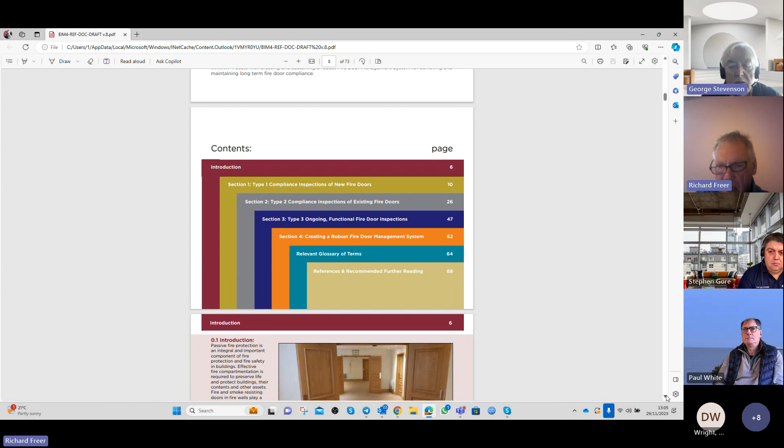There's the index. Just before we move off that, one of the things that has become very apparent, and I think we're aware of anyway, is obviously with the new regulations, the regularity of inspections is increasing.

What I was talking with a fire engineer this morning, and he was saying that they've just completed some work on a hospital that's been open for 12 years. And they've identified in this last sort of 3 months that there are 300 fire doors that are not acting as fire doors - in other words, they're not in compartments. So therefore, for the last 12 years, they've been maintaining these and inspecting them as fire doors where they don't need to.

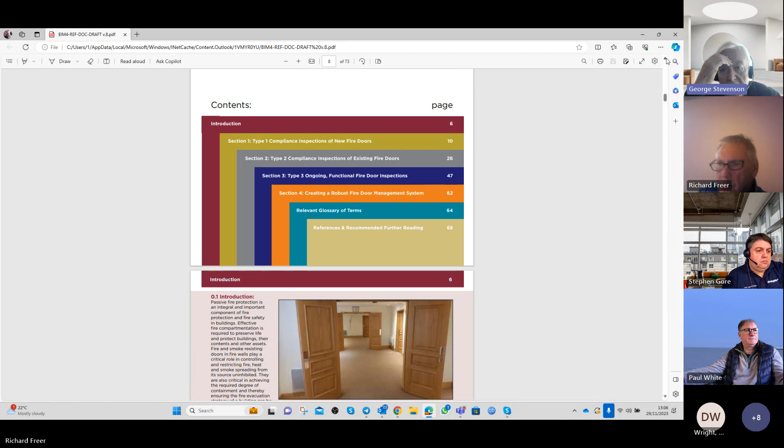And I think that's quite a regular problem that I understand happens. So to a great extent, if you scroll up for a second, Richard, the point that the team have made is that the initial inspection of section 1 and 2, or the type 1 and 2 surveys, either for inspecting a brand new fire door and making sure that it's fit for purpose to create that baseline, that is only ever done once.

And then the type 3 surveys are the ones that get done regularly. And exactly the same with the existing fire doors - that inspection's only done once to identify what it is and whether it's the right thing for the right context. And then on an ongoing basis, you've got the type 3 surveys.

So I'm sorry if that was interjecting. No, I'm glad you did. That's something that I've learned over the last year or so, as a layperson, obviously. Yeah, anyway, carry on, Richard, please.

Sorry, I'm just finding - can I just say something to follow through with what George was saying? The issue at the moment is everybody thinks they're doing a type 3, but because of all the legacy stuff, they're actually doing a type 2. So until we get to the point where everybody's had a more recent type 2, then the type 3 is still irrelevant to an extent. So unless you've actually got a type 2 report sitting there, which if you don't have that, you need to get, then you can't really move on to a type 3.

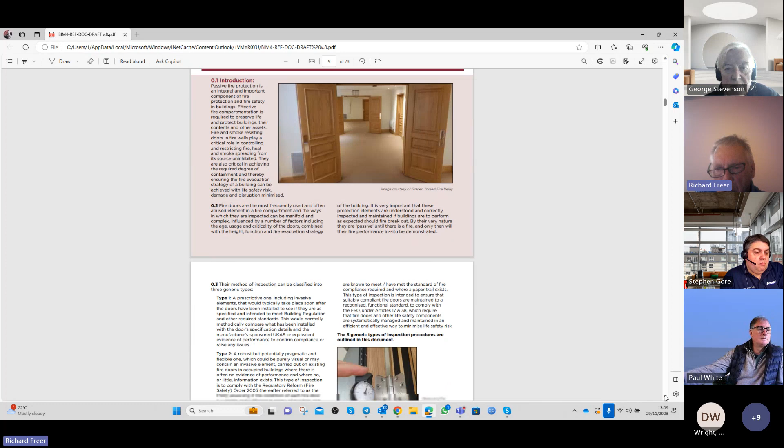That's brilliant. Thank you. Okay, let's just whiz through this. So this goes into some detail.

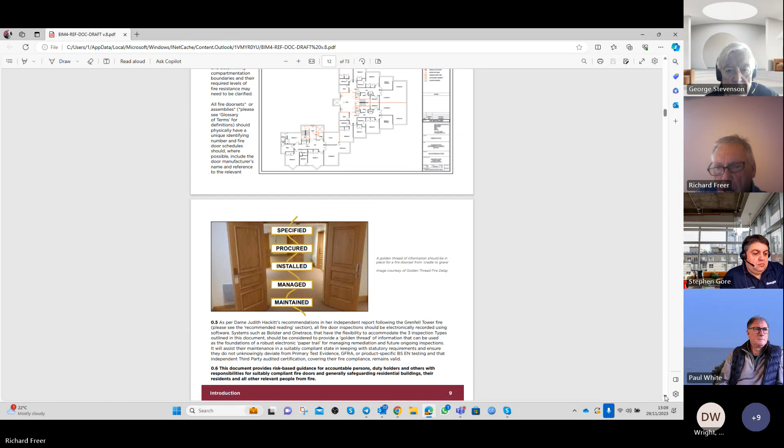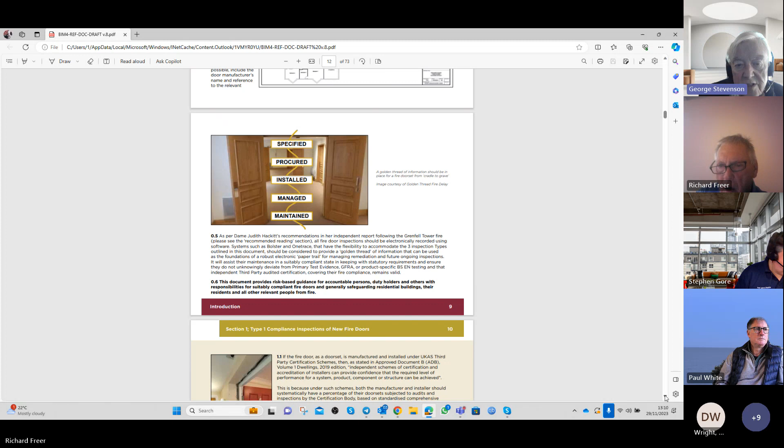George, if you want to comment on any of this, do so. Yeah, as I understand it, fire door inspections are still not there, although there's a number of different accreditation agencies and the like. There's still no qualification per se, no requirement for the person doing the inspection to be at any level. So this is an attempt, I think a very good one, to provide that background and guidance for people to be able to do that.

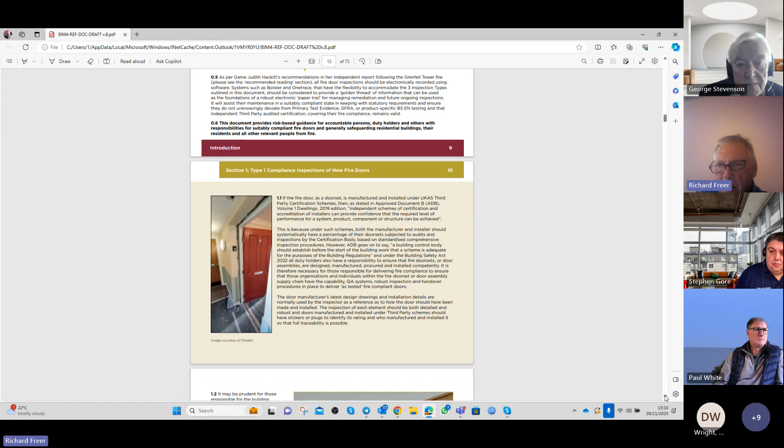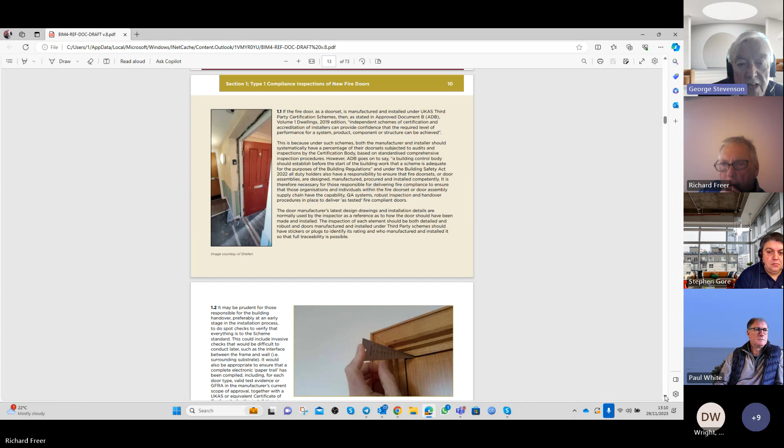All right, this is about compliance of inspections. Sheldon, for example, who are one of our members, one of the collaborators, they've provided those examples there. So carry on, Richard. No, please do, please do.

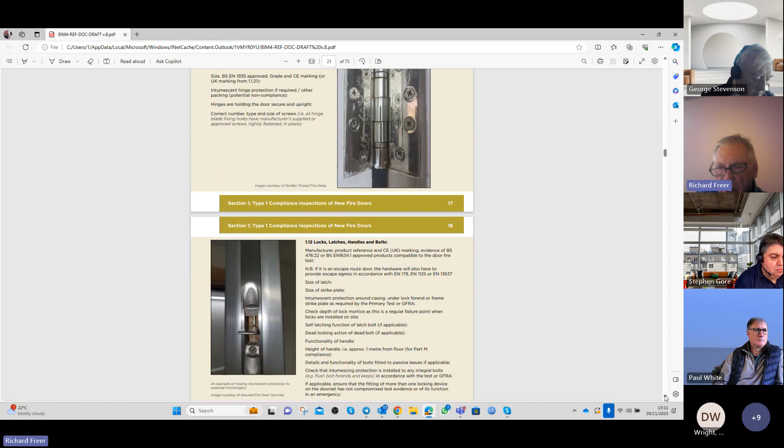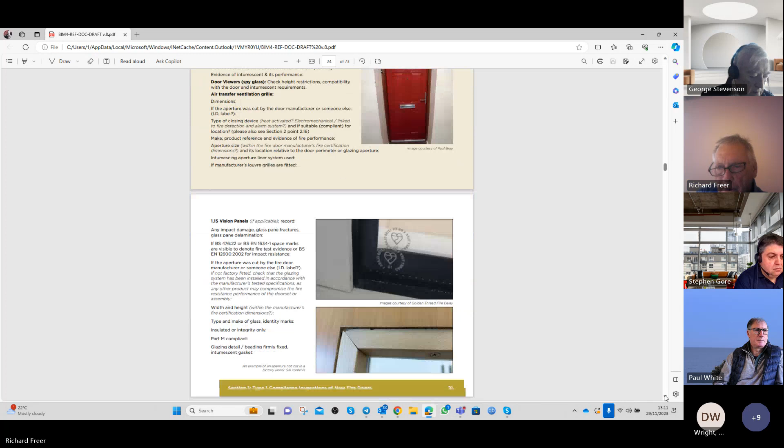That continues with now looking at new fire doors, compliance. And then we go into a lot more detail, looking at gaps and seals, hinges, locks and latches, the door closer, and any other ironmongery, such as letterboxes, vision panels. So there's quite a bit of detail in here.

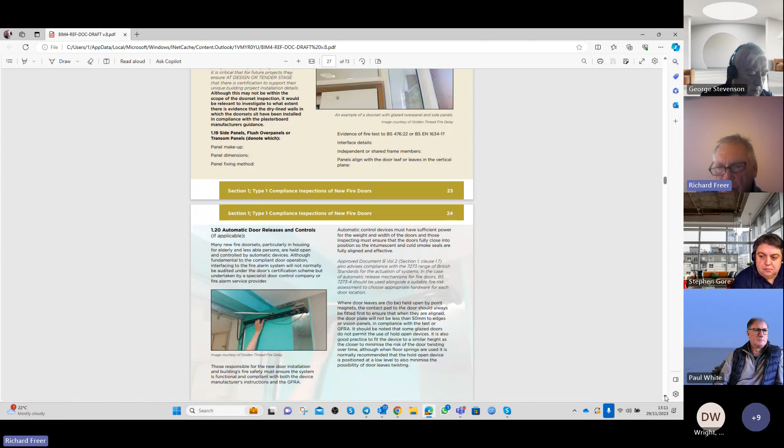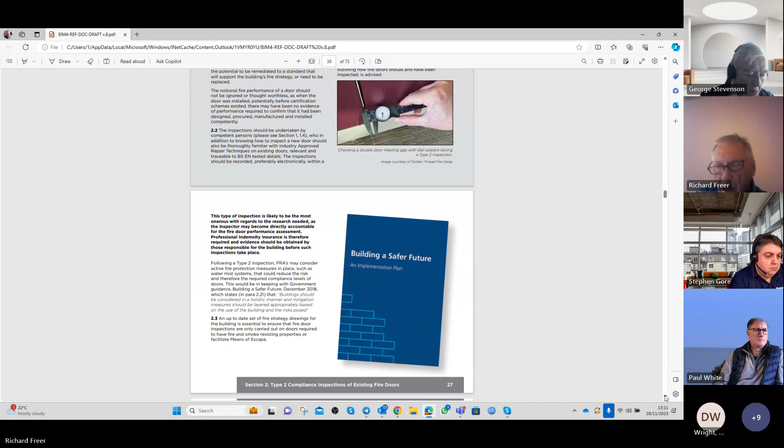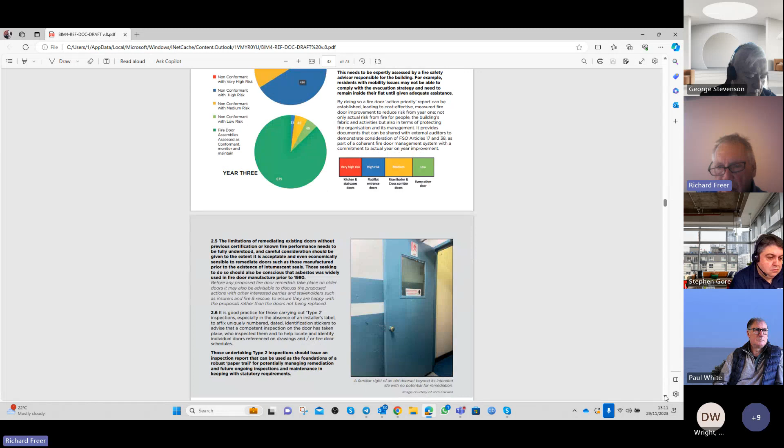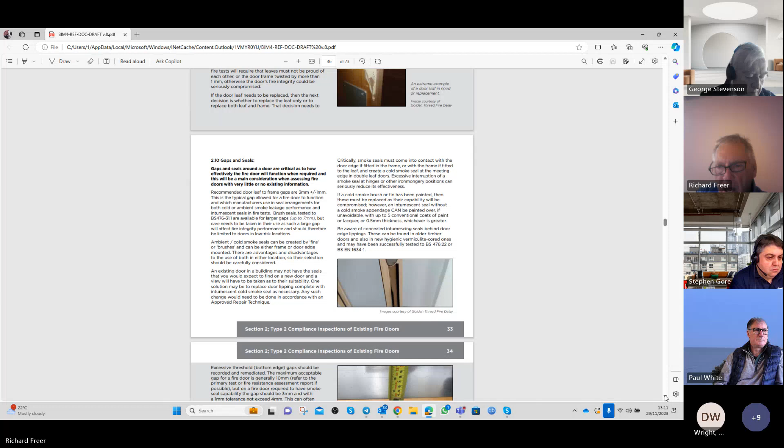And this is all for type 1 inspections. Type 2, which is about existing fire doors, it's a bit more complex, looking at the absence of information. Again, the various examples of things that are wrong.

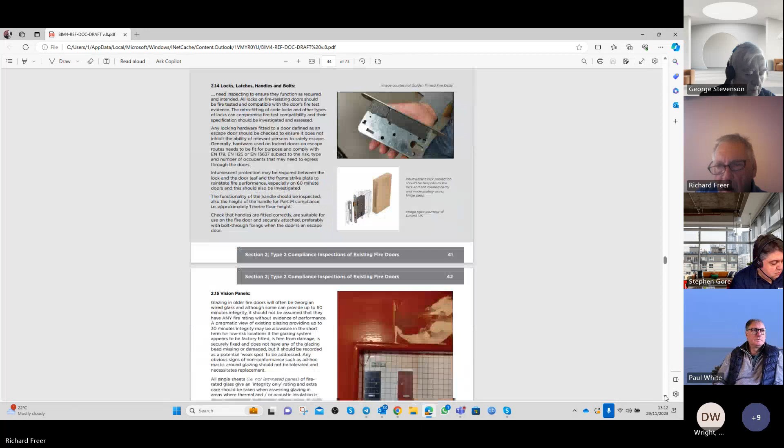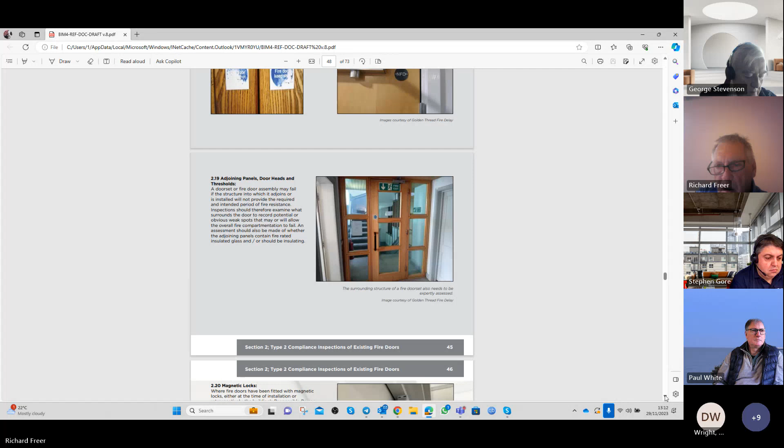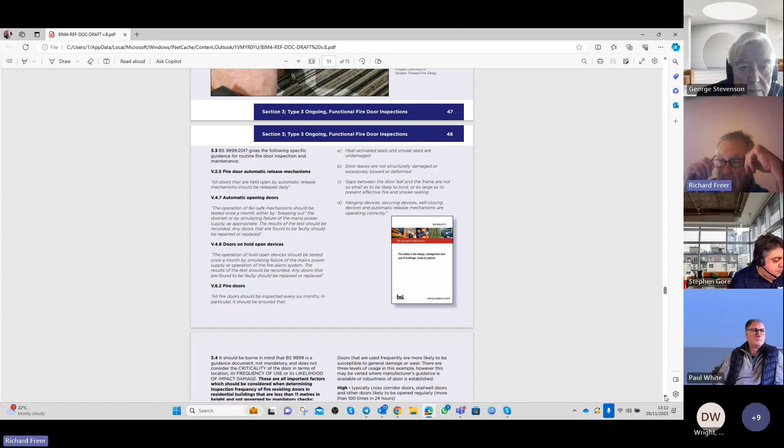It's very thorough, isn't it? Right, type 3, as Paul said, these only come into play once type 1 or type 2 has been done. These are the less onerous, but just as important, obviously.

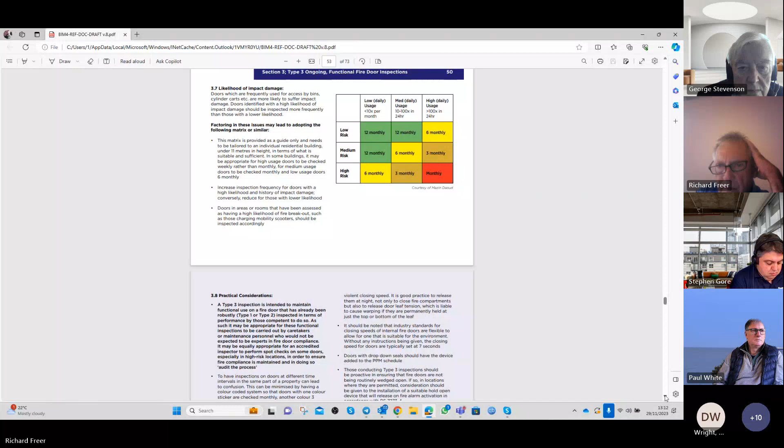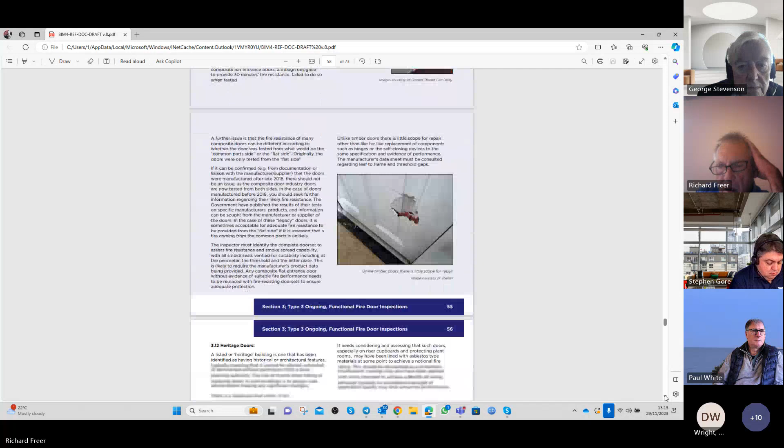I think the important thing here as well is, as I understand it, there's no such thing as a simple checklist. That's why there's quite a lot of background on this, and also you've got to consider it in line with the fire strategy and the other considerations. But yeah, carry on, Richard.

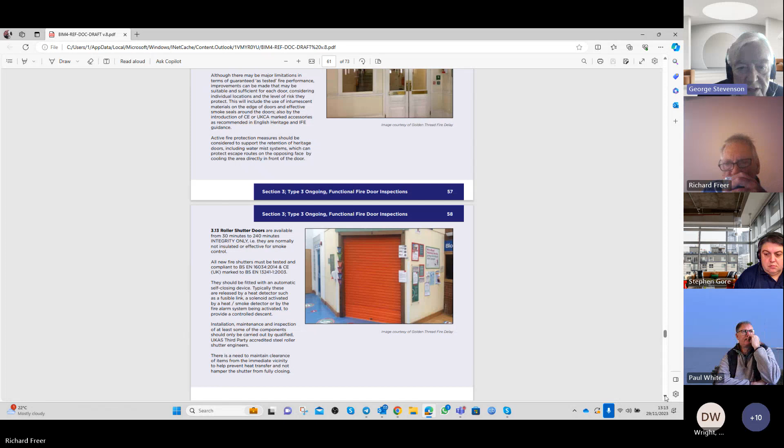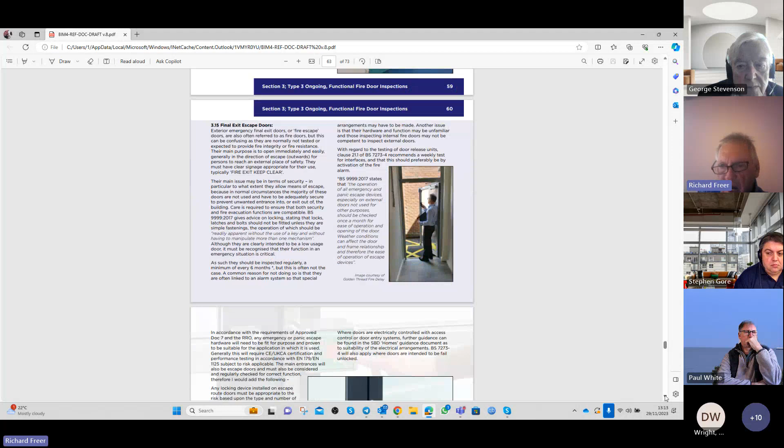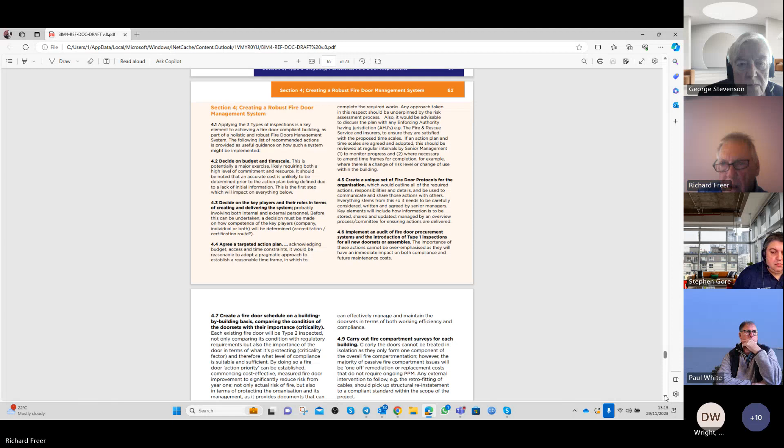Looking at the different functionalities. Yeah. And now the planning, it's about creating a fire door management system that is robust. And then just glossary. So quite a nice looking document we've got together there, I think.

Anybody got any comments on that? Yeah, no, not comment. I think that looks very good. I mean, perhaps the only thing, I haven't looked through it in any detail, Richard, but one of the things I've been trying to say to people when they're going to look at smoke control systems and fire damper systems, which is a similar thing, is where's last year's report? Where's the schedule?

Yeah, and I don't know whether that's mentioned in here. So, for instance, where's the type 1 report? Where's the type 2 report? And if you've got a management system, then brilliant. But what's changed, and have things been fixed? Because one of the key things when you're auditing something is, you've been given this list last year, and you only did something a week ago. Do you think that's adequate?

So look at whatever records exist, and if there have been any intermediate things - a positive record is just as good as a negative record, because it shows that somebody's looked. If that makes sense. So it's things like that when you're auditing, you can have confidence in the management system.

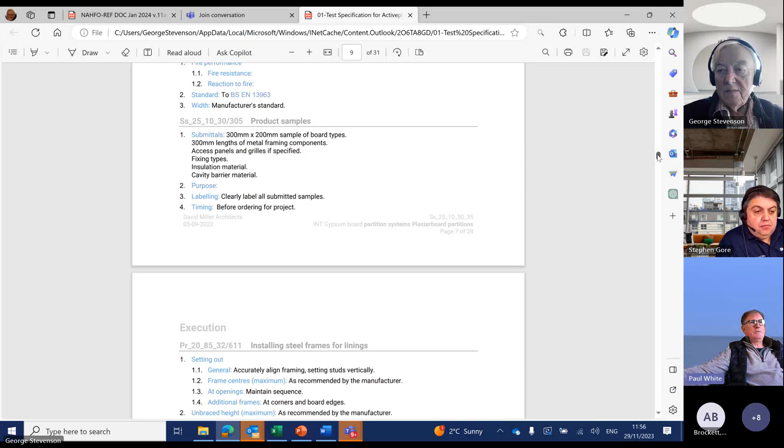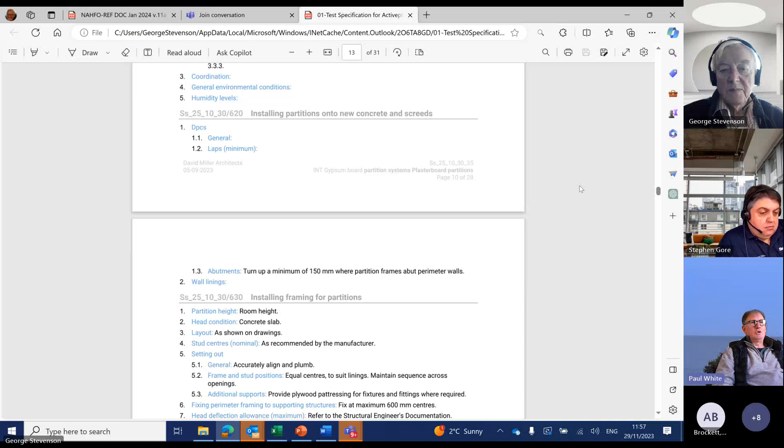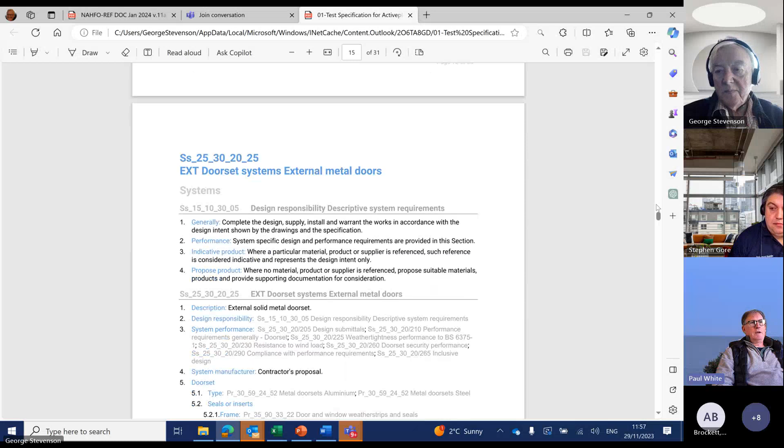I mean, I think that's the point, George. This is a kitchen sink specification to the nth degree, and the point is that it's meaningless because there's way too much information. And this is the problem. In terms of an FM manager going to replace a door, unfortunately, they're going to have to find an expert, because they're going to have to consider everything and specify the correct door, because at that point they have a design responsibility. And again, I think what we're seeing is that most people don't realize the level of responsibility they're taking by just changing things.

Yes, and I don't think they realize the responsibility they're taking by not fixing things either, but because they have no experience of it. For example, you've got a housing association that's got a particular problem where a tenant - the entrance door to their flat's been smashed in.

So the asset team have got to obviously make it good as quickly as possible. Now they can obviously put something temporary in there to provide some sort of security, but it's not the case that they'd be able to so easily go back to the original supplier. I don't know, it seems to me to be a complex thing.

And this is your chicken and egg situation where you're absolutely right - at the moment, it's impossible. So therefore, you've got to find somebody who's a designer who's got to go and look at that and do it properly. Hopefully, going ahead with the golden thread, they'll just be able to go doop, doop, doop - oh, it's one of these doors, and then they go and buy one and put it in.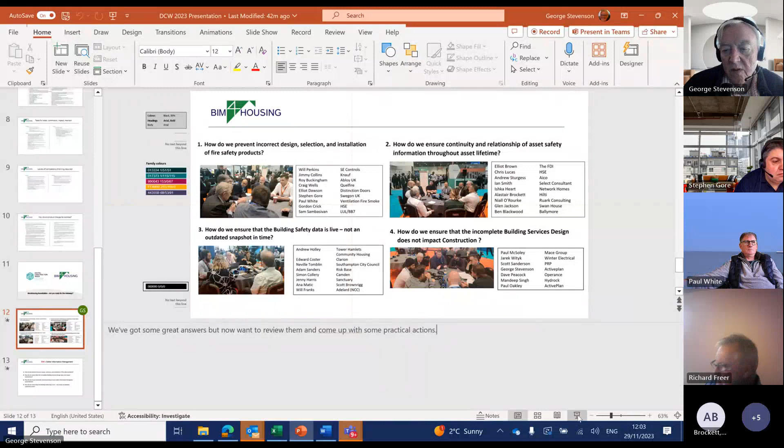So these are questions that came up in the summer, exactly from what we've just been talking about: how do we prevent the incorrect design, selection and installation of fire safety products? We had the workshops and we've produced a document from the suggestions that people have made.

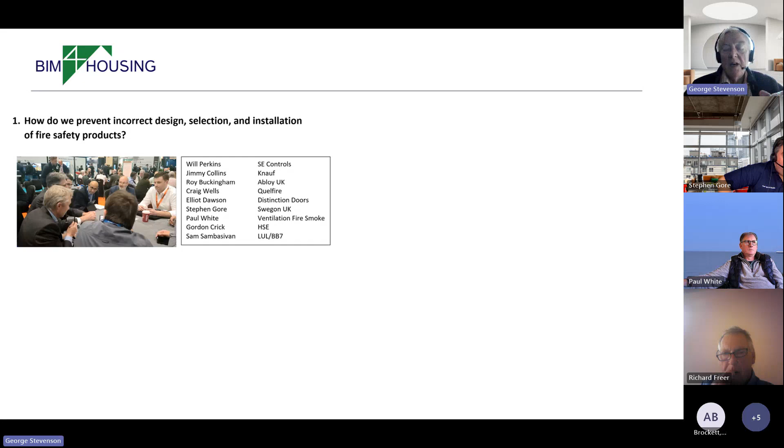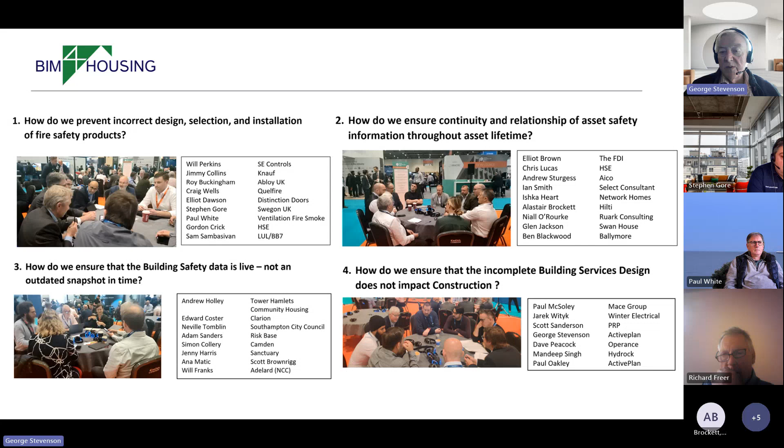This is the next question: how do we make sure that the asset information continues through the process? Also, how do we make sure that the safety case information is not just a snapshot in time, that it's a building safety management system? And also, how do we ensure that in particular contractor design portion, the M&E design doesn't get done after all the partitioning is installed? So we've been doing this now - a lot of people on this call know this.

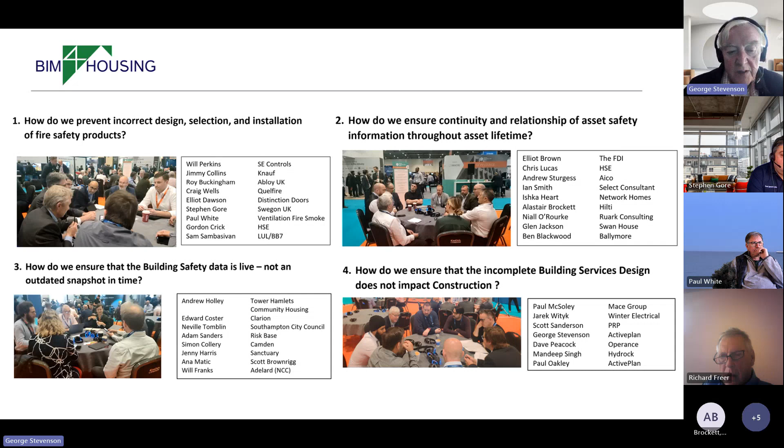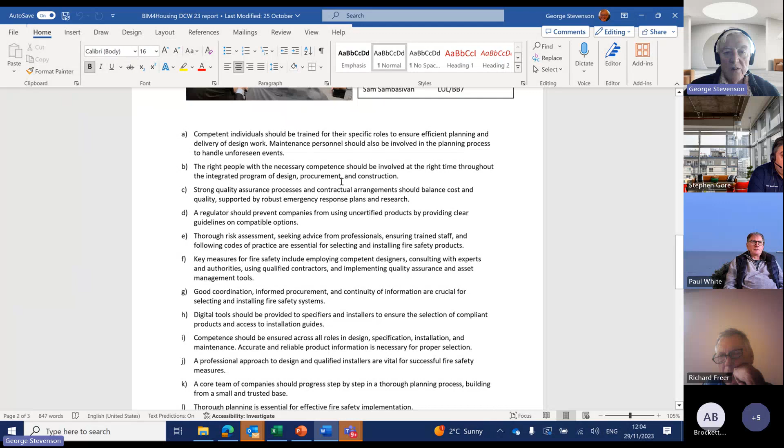We produce this document, which is the summary of that work - these are the sort of contributions that people have made, which I think has been quite well received.

And then, so we've got next week two sessions of new people looking at these as well. I think, Richard, we've got about 20 to 30 people on each of those sessions, haven't we? Something like that - over 30, 20 to 30 on the first three.

Around about 15 or 16 signed up so far on the fourth one, but there's still people signing up, and new people also. The purpose of this is to flush this out, because these are the questions we've actually been talking about this morning.

Should we just put it if you want to come along? Right, there are 2 of them on the 6th of December, and 2 of them on the 14th of December, so those are the days. So put in the chat that you're interested and which question, and the dates, so people know exactly.

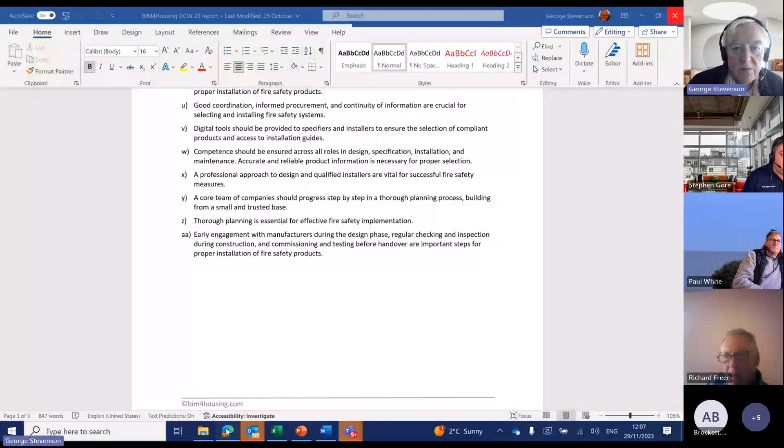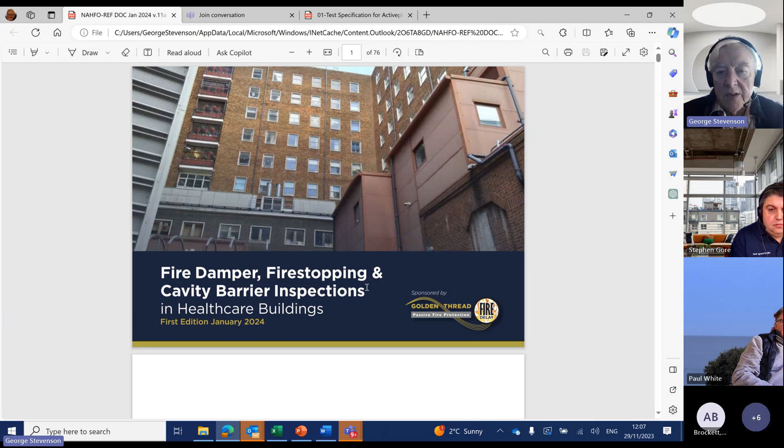Okay, and then let me show you this—this is the work in progress that has been done. I think Paul, Steve, have you been involved in this one? No. So this is being produced again, coming out of healthcare or the NHS, same sort of format, but this time it's for fire dampers, fire stopping, and cavity barriers.

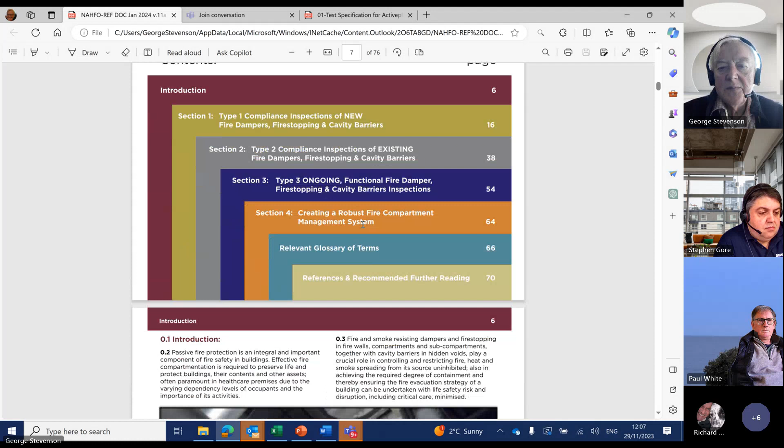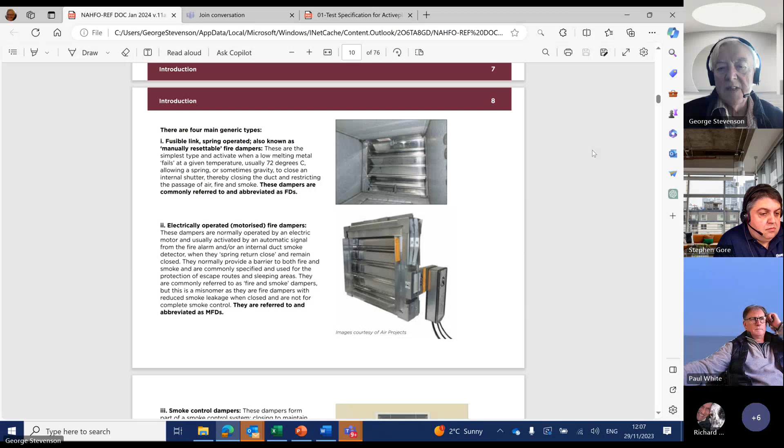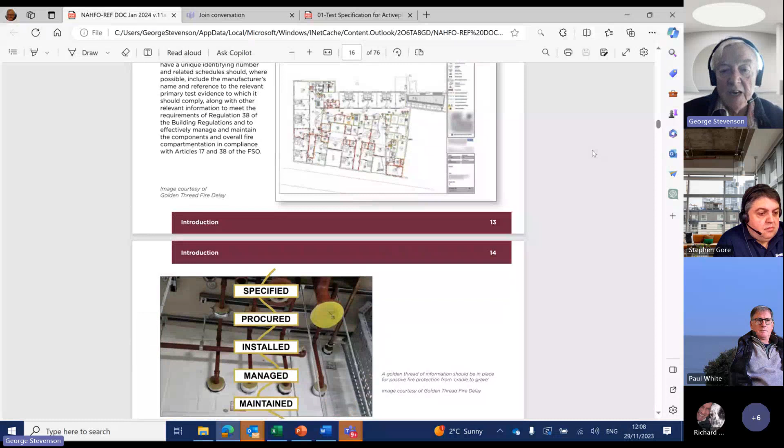So we want to do the same—we're being given the opportunity of doing the same for our residential products. I don't know what you think, but would you agree this is really good stuff? I know you've not seen it yet, but any observations?

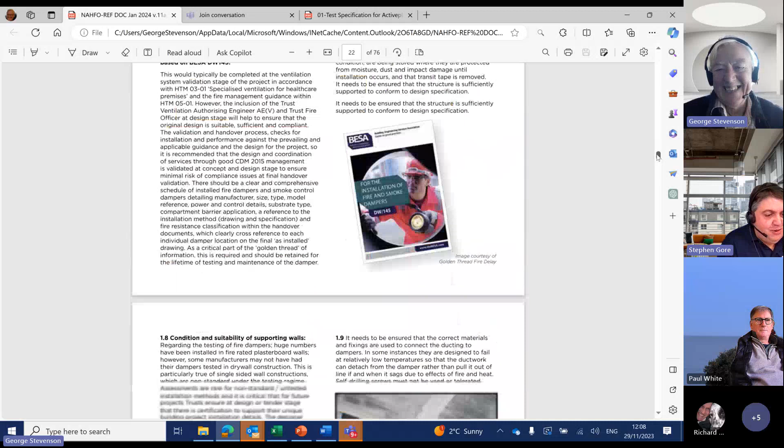Can you give better pictures of dampers? Yeah, absolutely, you're more than welcome, I'll email some over. Well, what I'll actually do is send you this, I'm going to make it available to you.

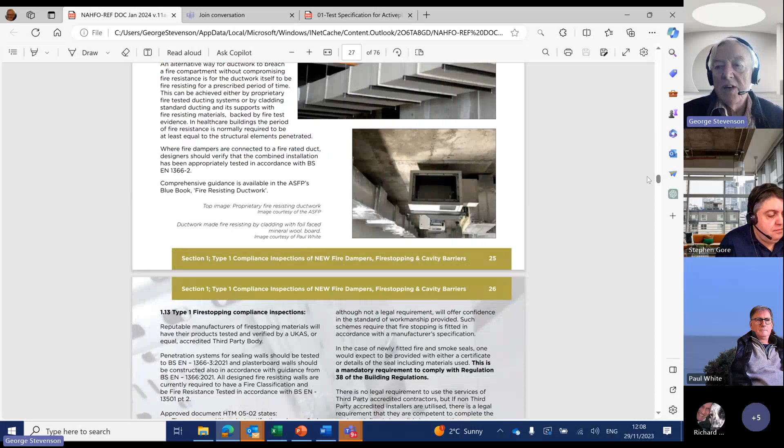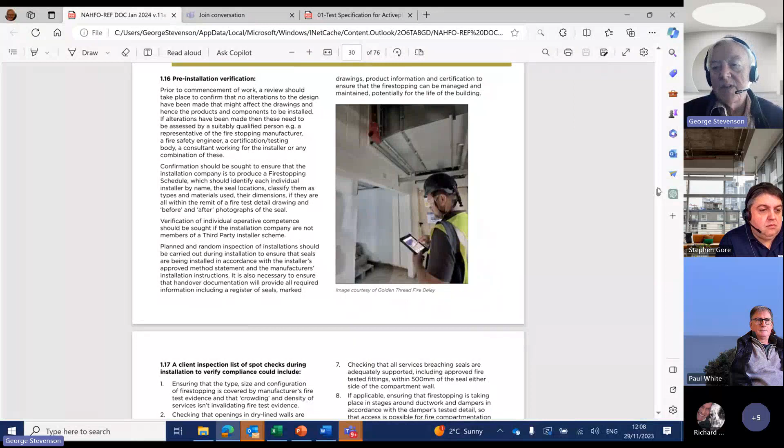Because what we actually want is something in context—you sending me some photographs of dampers isn't going to help me at all. But if you've got something that is contextual, Stephen, that would be fantastic. Yes, send it over and I'll have a look. Yeah, and same with anybody else.

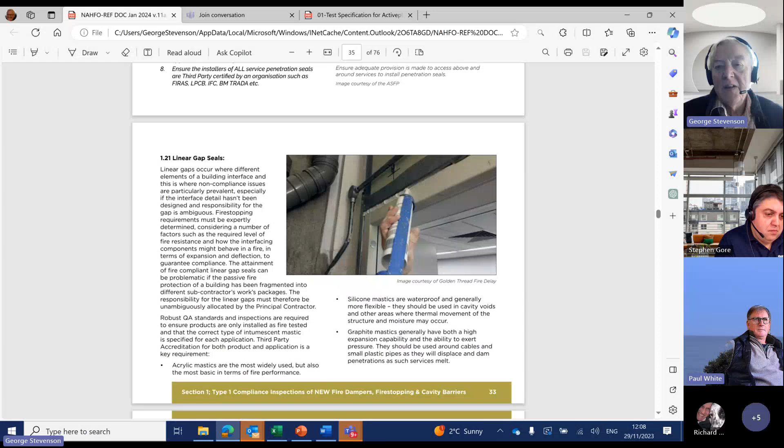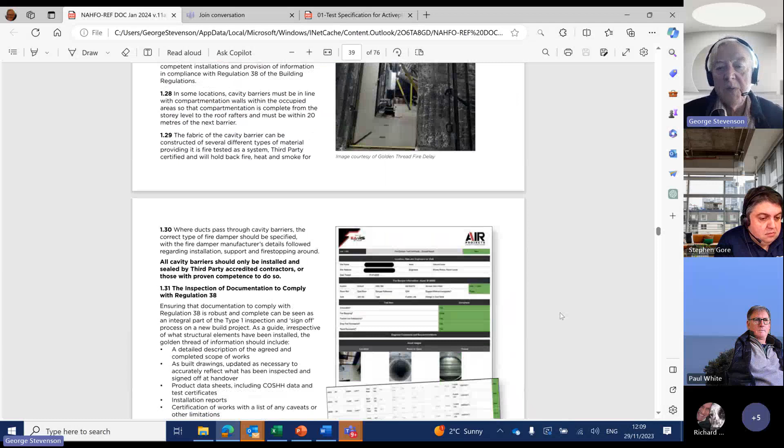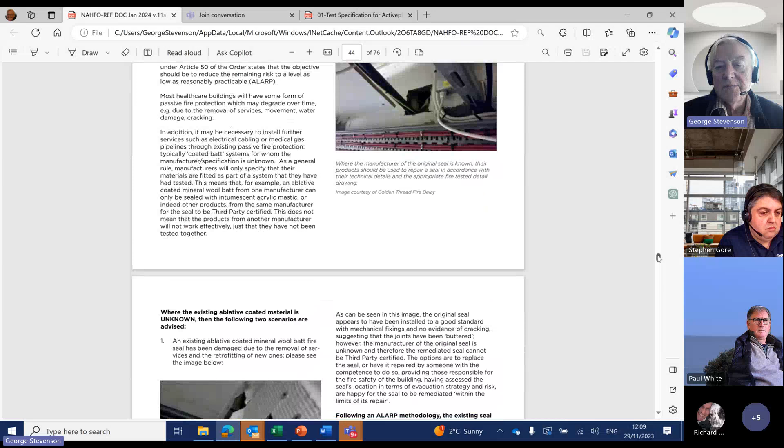If you've got some suggestions in terms of this—again, this is work in progress—but it's being shared with us because the people authoring it have been impressed with the work we've done on the fire doors. Yeah, okay, that's that.

Could you also send that to me, George? Just let me have a look. Most definitely, yeah. I'd only seen a draft, I don't think I'd seen that one yet, so I went fairly comprehensively through the draft, but I don't know, as you say, whether the pictures are relevant necessarily. No, sure.

Any other observations? If anybody wants a copy of that to have a flick through, just put it in the chat. I think Alistair's put it in. Yeah, good.

The idea being—and Dave Williams, yes, Dave Williams—and sorry, what was the other guy's name? Adam? Howard Hall. Howard Hall, sorry.

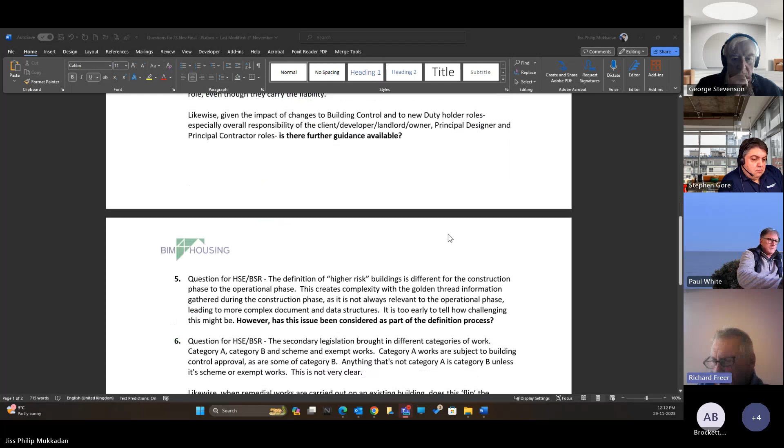Right, this was for the HSE and BSR. The definition of a higher risk building is different from the construction phase to the operational phase. This creates complexity with the golden thread information gathered during the construction phase, as it is not always relevant to the operational phase, leading to more complex document and data structures. It's too early to tell how challenging this might be. However, this is the question: has this issue been considered as part of the definition process?

So has anybody got any views on that question? Whether it's clear enough, whether the background covers everything, or should there be other things included in that?

It's obviously very relevant to this group. Dave had a contribution to that last week. Mustafa, you're with Clarion, aren't you?

Hello, yes. Clarion, I just wondered - obviously are you still working with Jack on the existing estate? Existing stock? Yes, yeah, yeah. So would you - I'm sorry to pick on you, but right, that's what we do.

Would you have a view on the way existing buildings are being considered as HRBs? Because it's not just the height of the building, is it? It's also how the building's being used. That's my understanding.

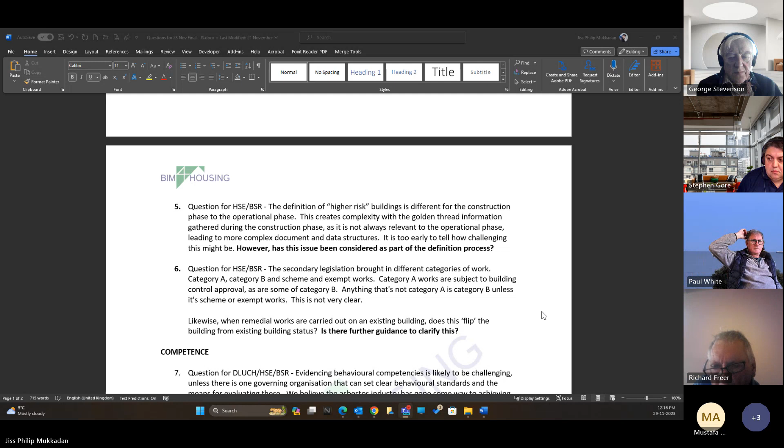Yeah, so let's look - we've got 10 minutes left. Should we look quickly at the next one, shall we? Oh no, the next one's... sorry, I'm not sure the next one is actually relevant.

The secondary legislation brought in different categories of work: Category A, Category B, and scheme and exempt works. Category A works are subject to building control approval, as are some Category B. Anything that's not Category A is Category B, unless it's scheme or exempt works. This is not very clear. You're not kidding. Likewise, when remedial works are carried out on an existing building, does this flip the building from existing building status? And our question to them is: is there further guidance on this to clarify?

Yeah, it's almost tied into the previous question, isn't it? Well, no, not yeah - is it? This is more about the second part of the question: obviously if it flips from being an existing building, then that is more onerous, isn't it? Very much so, and there's a lot. This came up in a couple of the meetings. This was a very, very big point because nobody had a clue.